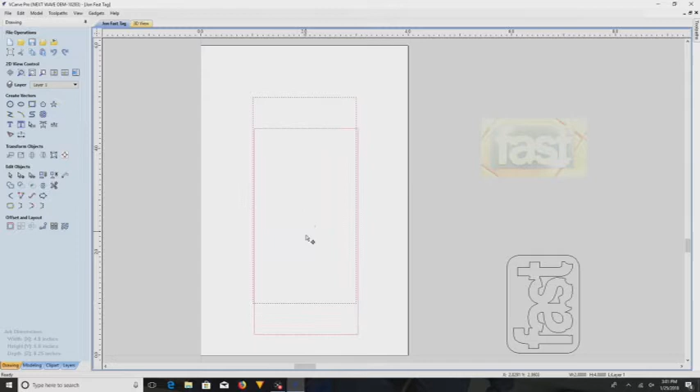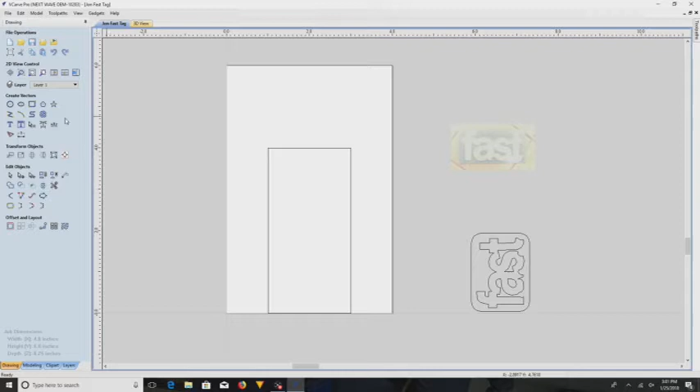That is, for lack of a better term, I guess, the handle. Now what I'm going to do is try to make an arc from this point. Zoom in as much as I can here, get it exactly on, and move this up here. Yep, as much as I can go in. Right there, boom. Now let's go to the other side.

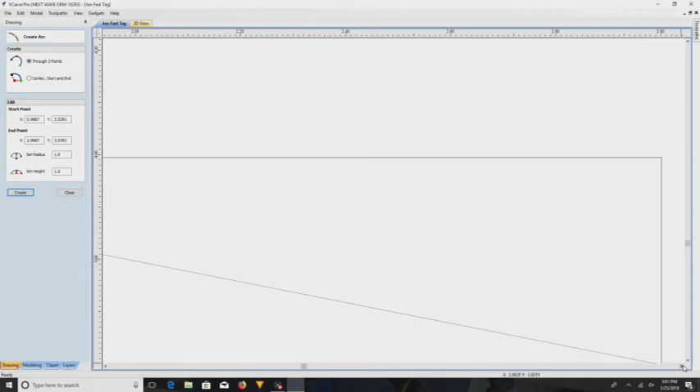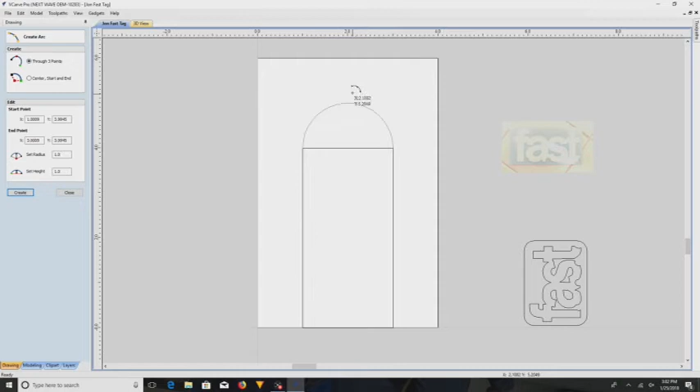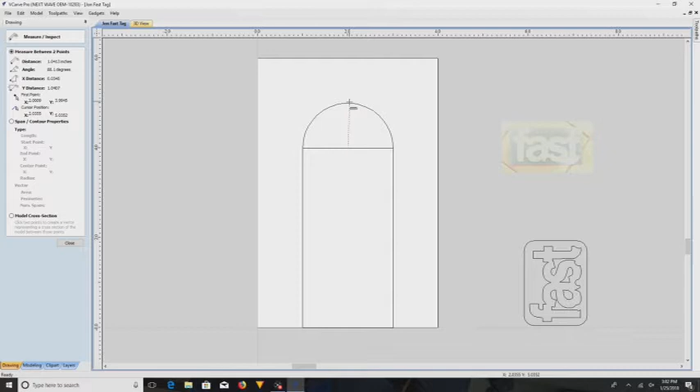There, and now let's zoom back out again. Let's just measure that and see. One inch. Let me measure my trusty little wine bottle opener here. Oh, and I got an inside opening of less than an inch, just about 3/4 of an inch, just slightly more, and that will be my inside opening. I think that's going to do, I think that'll do nicely. So what if I go ahead and...

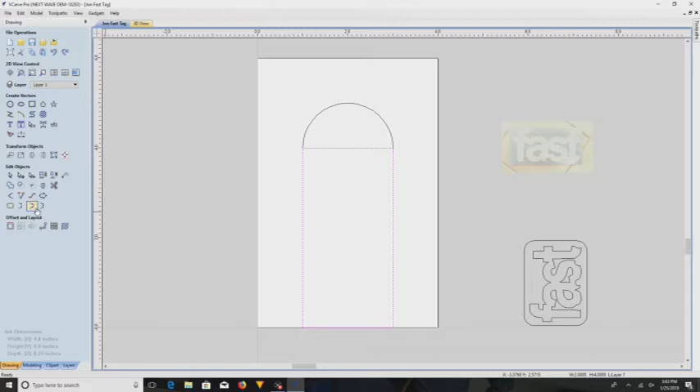I could trace this, boom. And I want to, you know what I'm going to do? I'm going to put some guidelines up. Actually, you know what? I don't know if that's going to work.

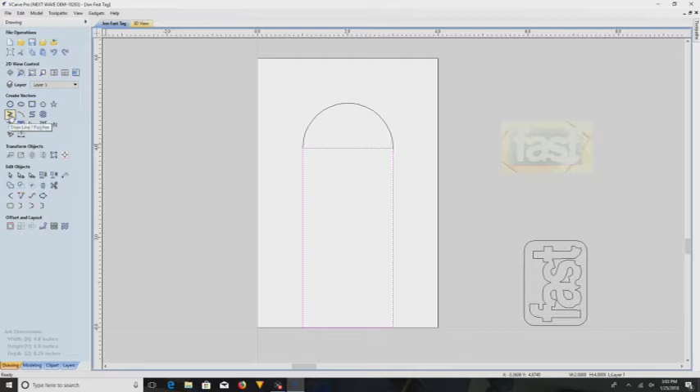Okay, so what if we do this? We go, put a guideline in. I know just for structural integrity, I probably want at least closer to a 1/2 inch between this bottom, because what I want to do is I want to flare this out. So I think I'll go down probably 3/4 of an inch.

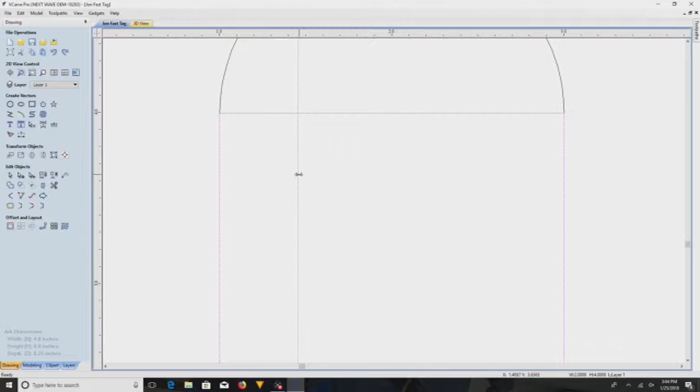So we're going to put a guideline in. Oops, that's fine, we need vertical. I clicked on the wrong line, but we need verticals anyway. Put another one over here. Stop it. And now we'll put a horizontal.

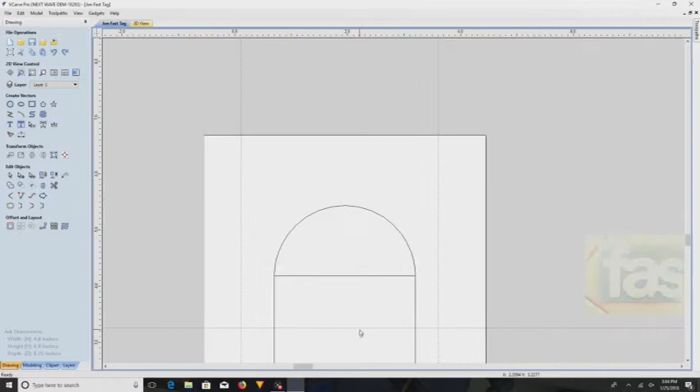So we're going to go down 3/4 of an inch roughly from there. And that's close to 4 inches. It's not perfect, is it? Let's bring this down. Oh, that's 3.3. That'll do.

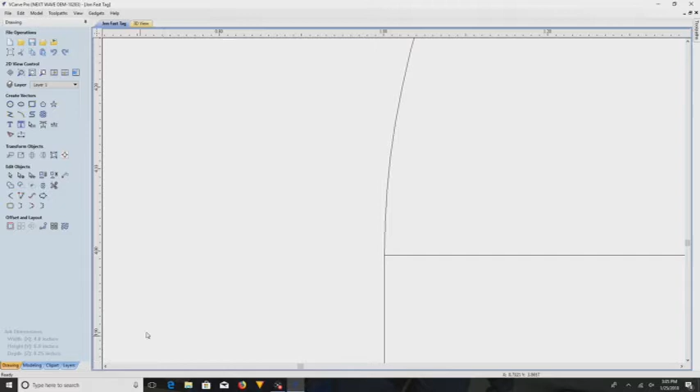Okay, this is, let's go in here, let's zoom in. Okay, so from there, that's on the 1 inch, looks like, real near, close enough to... come on... looks like just over the 1/2 inch mark. So we'll take this to right there, just for the sake of keeping it even, and we'll do the same thing.

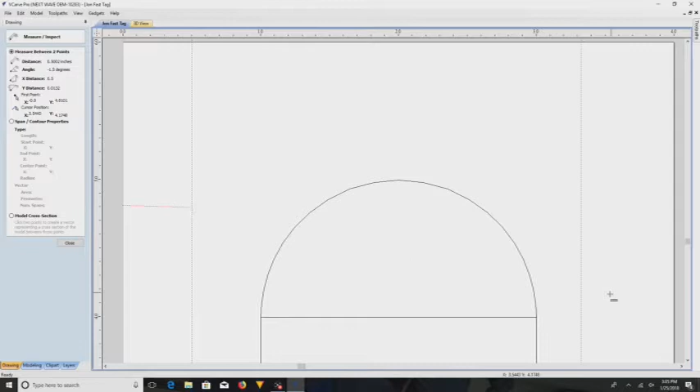Yep, that's half inch. Okay. The number shouldn't be wrong, but it just looked bigger than that for some reason. Then we'll take this one over here and we'll move it to 3.5.

Oh, got to get up with that first. Okay, right there will do.

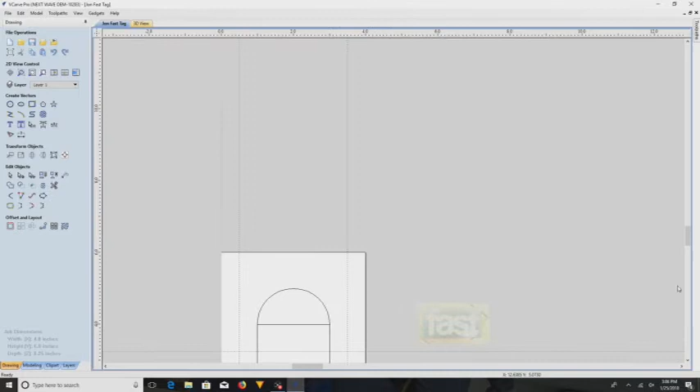And so now, I think what I'm going to do is I'm going to make an arc, and I'll go from here. Actually, do I want to do an arc? Let's see how it looks. There. And then I'll come, you know what? Stop. Let's put another guideline right here.

Oops. Right there, or as close as I can get to it. Perfect.

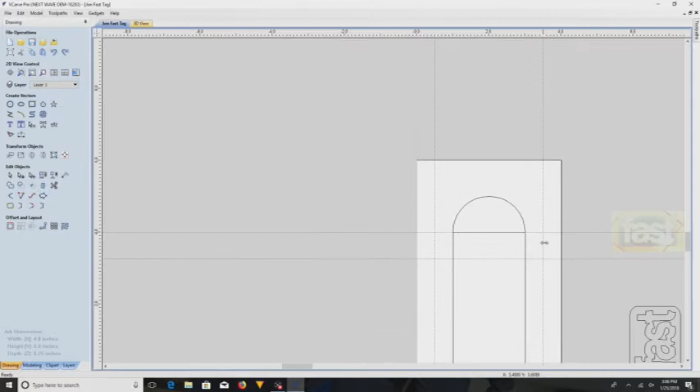And then I'll take my arc, and I'll go from this point to this point and arc it. I guess do it to where it's square on that line there.

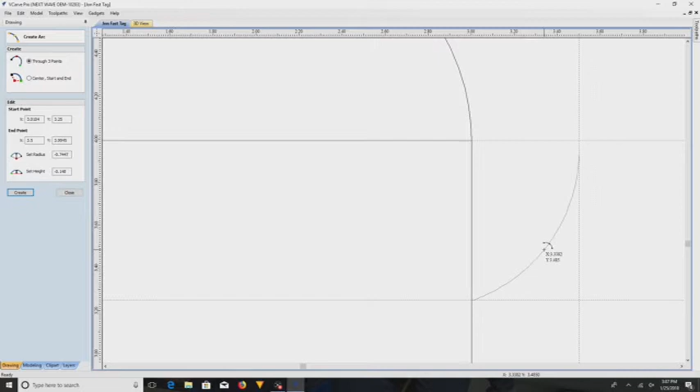Look at it, I'm not even touching. Undo, control Z. Try that again. Zoom out a little bit so I can see what I'm doing.

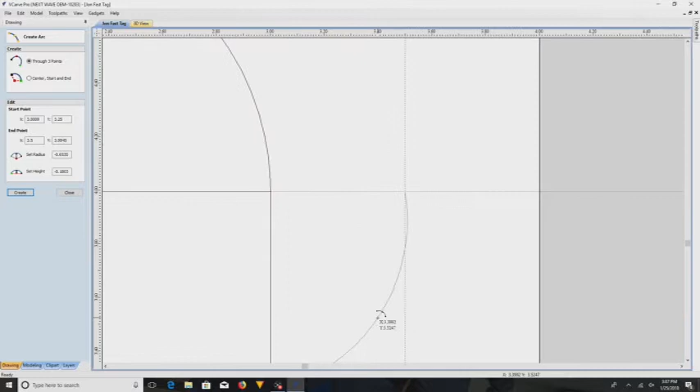Try that. Okay, and now let's do the same thing on this side. Actually, we should be able to just flip this. Mirror, left, boom, close. And now let's just take this over here and put it on those 2 points.

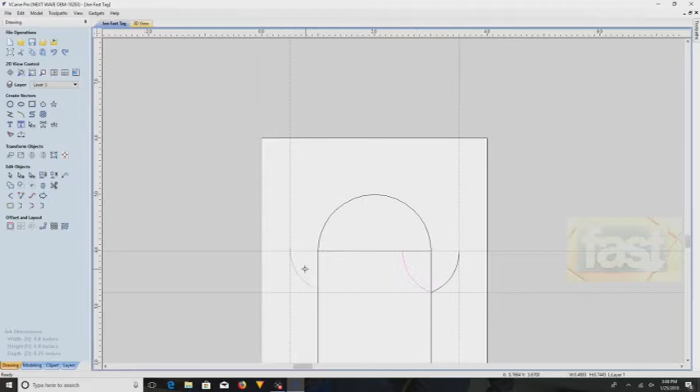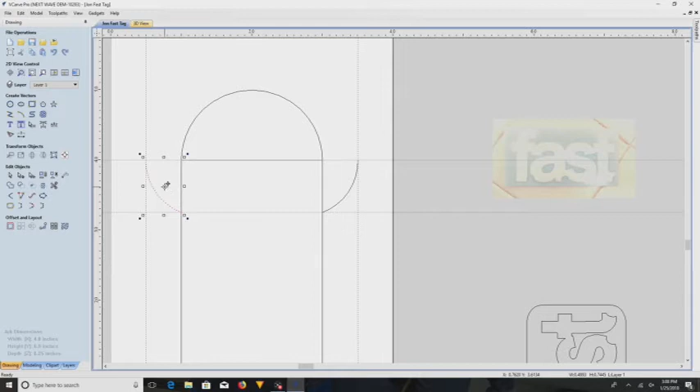It's not there. Ay, ay, ay. Maybe I should have just drawn a new one. There we go.

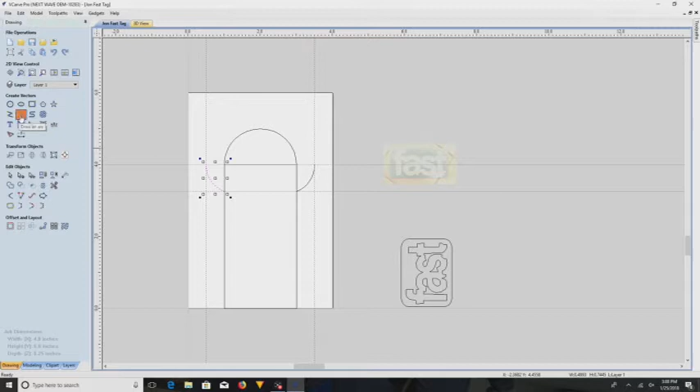So now, what if I just go... I wonder if I can just go like this. Boom. Boom. Boom. Looks like a mushroom. I don't know. Let's see. Close out there.

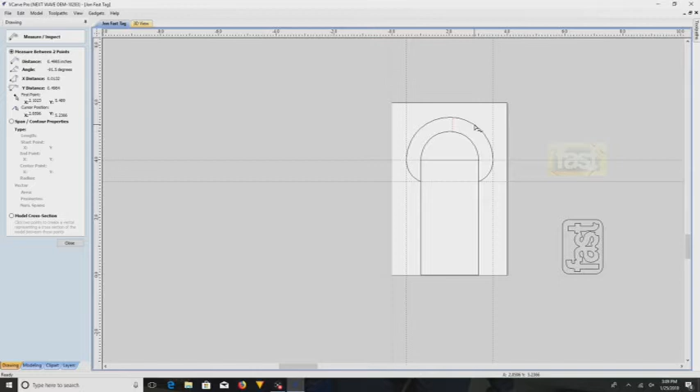Let's measure it. I'm just afraid of it being too thin. It's just like a half an inch. Is a half an inch wide of 1/4 inch thick 6061 aluminum going to be strong enough to pop a top off over and over again and not bend? You know, he's not paying for this, and there's only one way to find out. Let's just go for it. He knows this is an experiment.

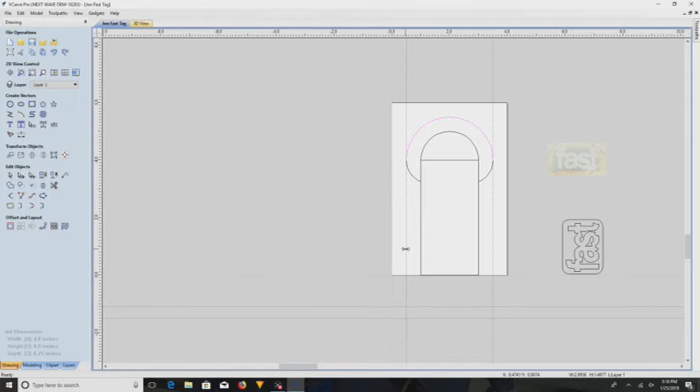Let's roll with it. Now, I think what I'm going to do is I want to stretch it a little. Oh, wait, can't. Next thing I have to do is I have to join all these vectors. I'm going to get these out of here. I'll need them later, but I'm going to get them out for now. Makes it easier to see.

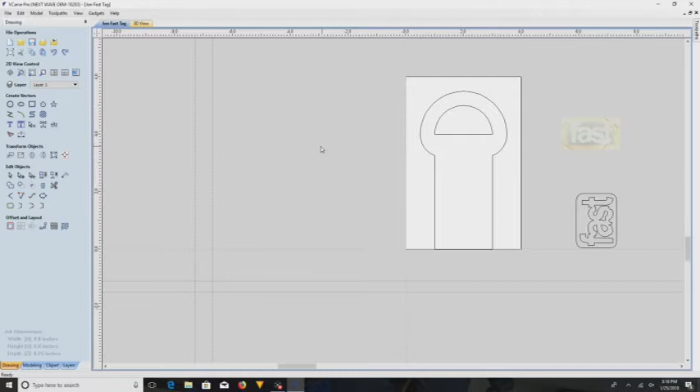Okay, so I'm going to go right-click, select all open vectors. Okay, am I going to be allowed to... Yep, okay, good. Is it just me, or does that look lopsided? I guess not. Yeah, I guess it's fine.

An inside opening of 1.9 inches wide. Let's measure my handy dandy little wine bottle opener. Let's see the inside. This is way too wide. I got an inside opening of like 1 1/8 at best. That's not gonna, I think that's too big.

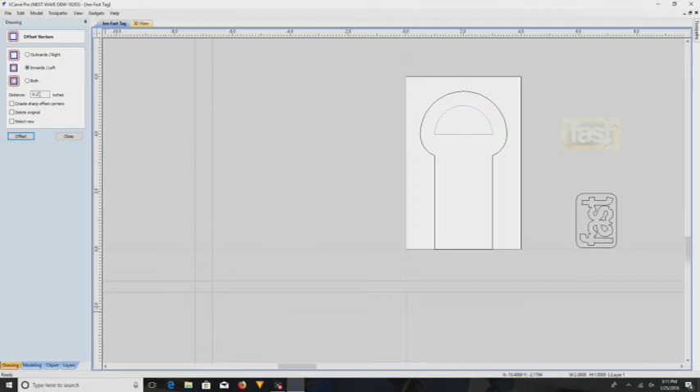What if I go like this? This will actually be better because it'll give me more. Let's highlight that, and let's offset to the inside. 2/10 of an inch, it'll give me 0.4. Let's see what that looks like. Boom. And that's going to make, before I delete anything, let's measure this.

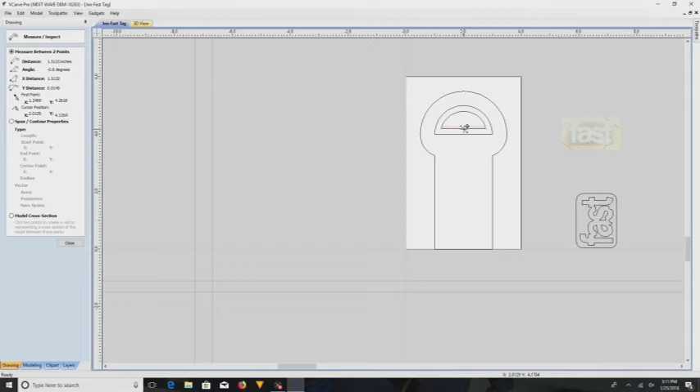1.5, that'll do. That's 1.5 inches. How about this way? Just over 1/2 inch. Let's measure the height. Yeah, I have about 3/4 of an inch.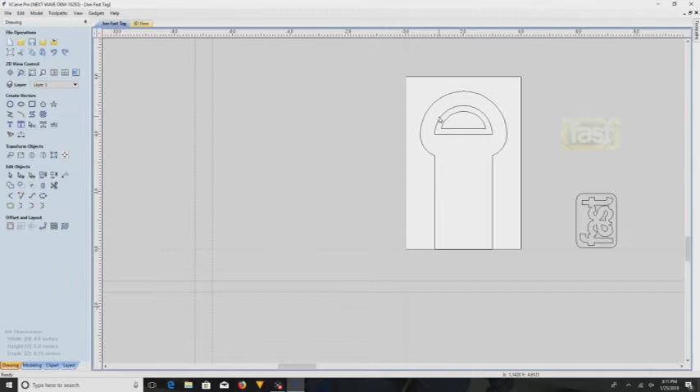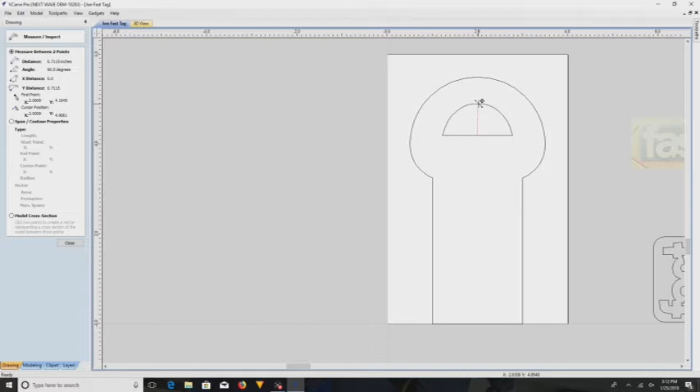But I think that would probably still work. Dilemmas. Let's delete this and see what it looks like. Delete. I wonder if I can just stretch this out a little bit. That looks better. Now let's measure it. Yep, just about, 7/10.

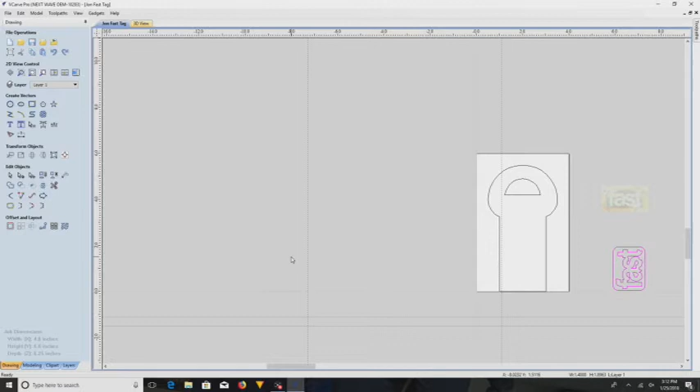Huh. We'll see. All right, so now you take this logo. Oh, I need my guidelines. So I'm thinking probably about 1/2 inch or so from each side. Just get them into place for now.

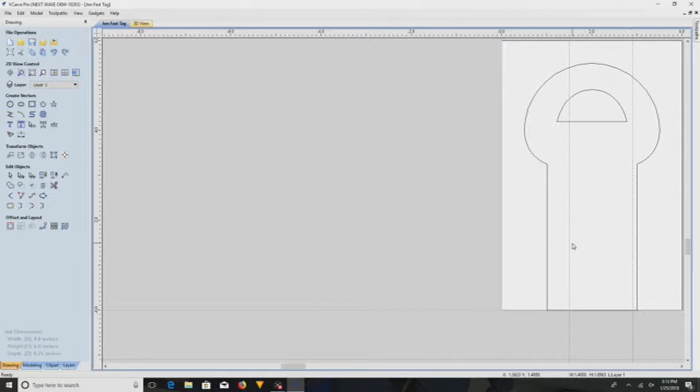So we're at 1 inch. Go to 1.5. Boom. And the same thing over here. We're going to go into... no, that's too big. That's too much. I want it bigger than that. Take it to 5. 1.25 inches in.

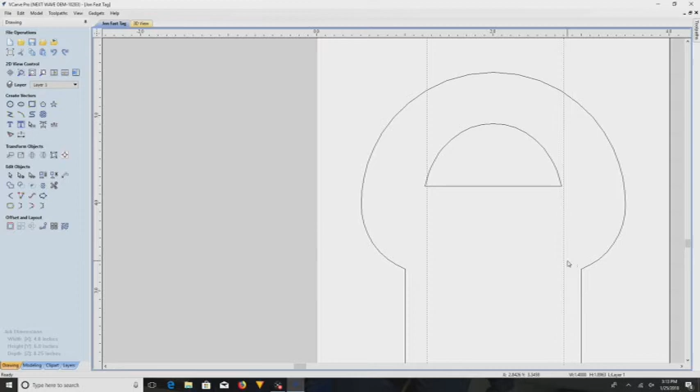And then we'll go in, that's at 3, so we gotta go to 2.75. Let's see what that looks like. Yeah, that'll do. And then we're gonna go ahead and we're gonna move this little bad boy right there. Look at that, almost perfect. Make it a little bigger, a little longer.

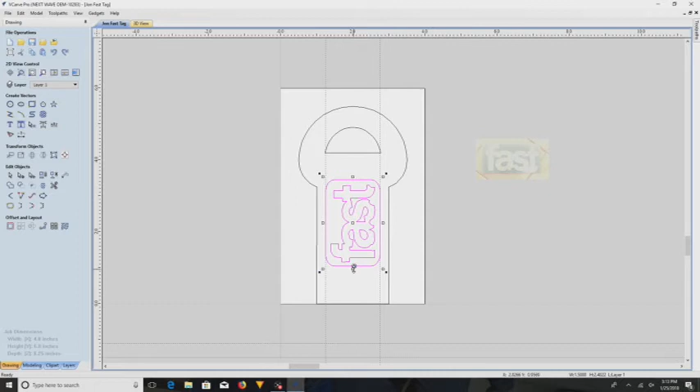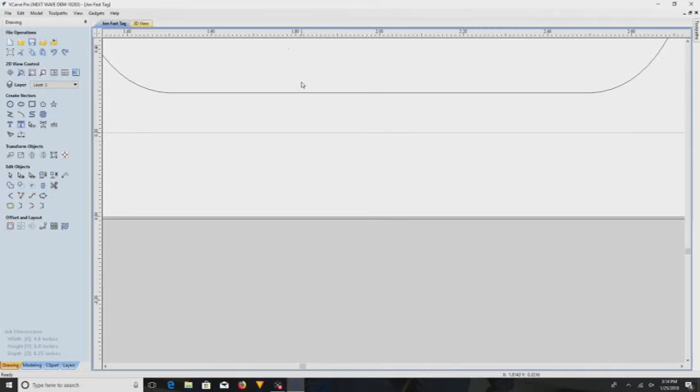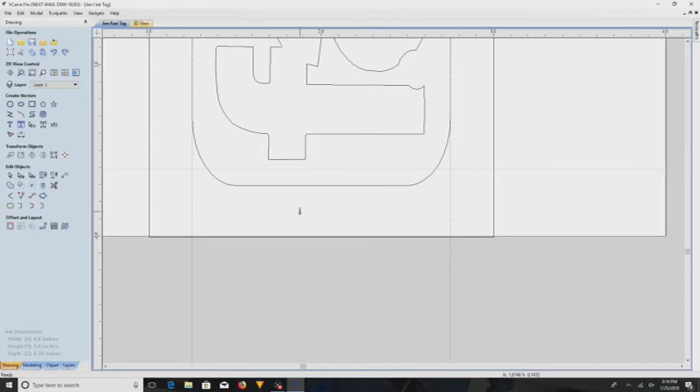You know what? Since I have it 1.25 inches in, I should do the same on the bottom. Oops. Quarter. What? I said 1.25 inches, didn't I? I'm tripping myself right now. 1/4 inch. No wonder. I'm like, this just doesn't seem right.

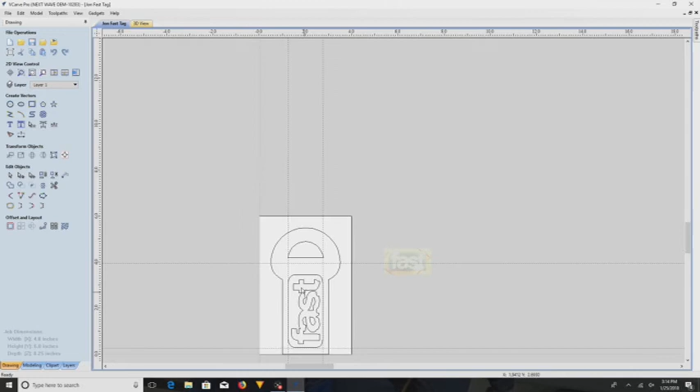And might as well do it at the top too. Where is this at? This is at an even 4.2, so we got to go to 3.95. Boom. Now, all we got to do is just pull this side up and down. I got to zoom in for this.

Now, let's start with the toolpath. Let's do the Vcarve first. We use an 1/8 inch end mill for an area clearance tool. We're going to go pass depth to 0.03, 20 inches per minute. Yeah, that's probably fine. I don't need to go too fast.

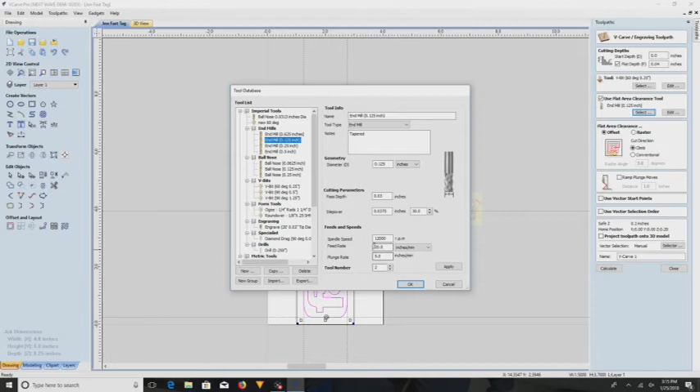Okay, and then we're going to go... Yeah, that's probably deep enough. It doesn't need to be that deep. And we're going to use a 60-degree V-bit, and we're going to calculate that. Reset preview.

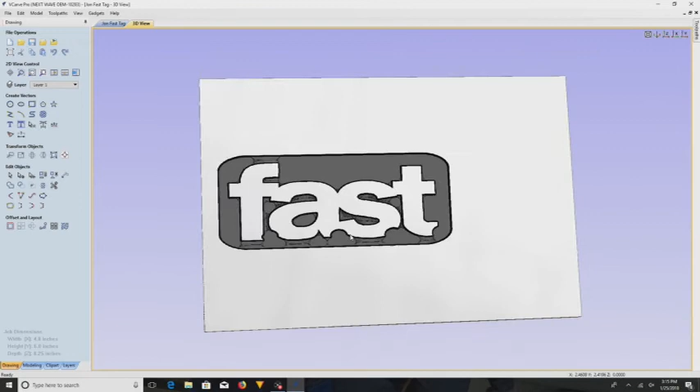Okay, now this is where it's going to get a little funky after this one here. This one's easy. I'm going to do a pocket tool path here. We're going to go 1/4 inch deep with an 1/8 of an inch end mill.

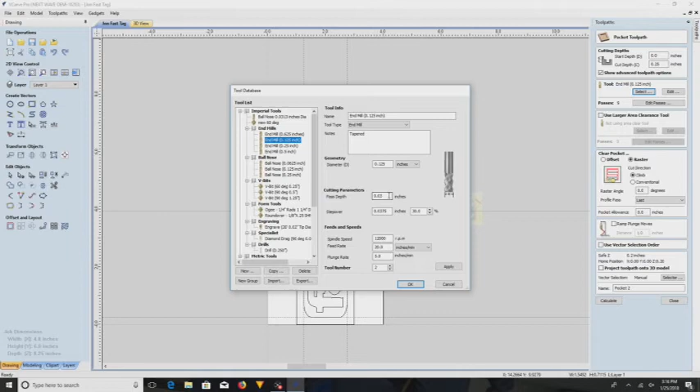5 pass depth 0.03, 20 inches per minute on feed. Let's do it. Calculate.

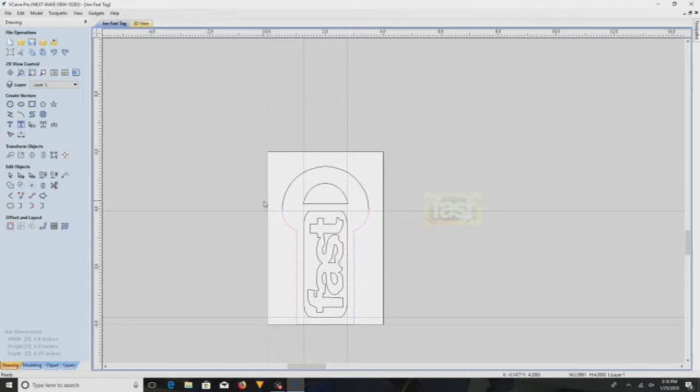Okay, so there's the actual business end of the bottle opener. Now what I need to do here is join those two lines.

Yep, look, it's going to let me do it. Perfect, I hope. We'll find out.

Now I need to go here to offset selected vectors. I need to select them outwards, I think 1/10 of an inch on each side. Let's try it. Oh no, damn it, outwards.

Let's go 2/10. I think that'll do. Offset.

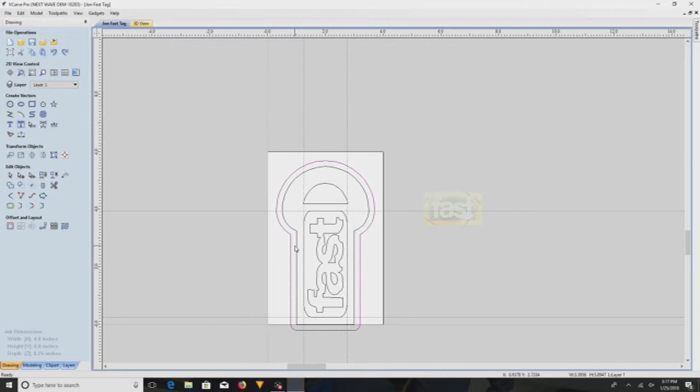Okay, close. Now do the last one, do it twice. See, what this is going to allow me to do is not cut a profile pass. So I'm going to select this, and I'm going to select this, and I'm going to come here, and I'm going to do a pocket tool path.

Whoops. The same way I cut out the keychain fob. It takes a long time, but I think it's going to be much safer on my end mill bit, since I only have an 1/8 of an inch end mill. Let's try this, going down 1/4.

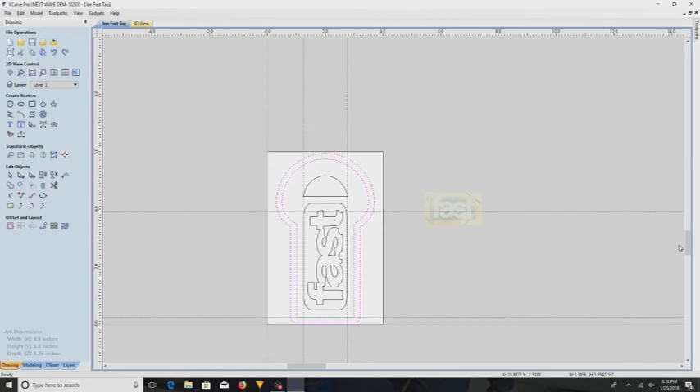20 inches per minute, yep. Calculate. Oops, calculate. Preview.

Yeah, I don't like that. Why did it do that? Seems weird to me. What did I do wrong?

You know what I might be able to do? Let's try this. Ungroup objects, back onto original object layers. Let's get this thing out of here.

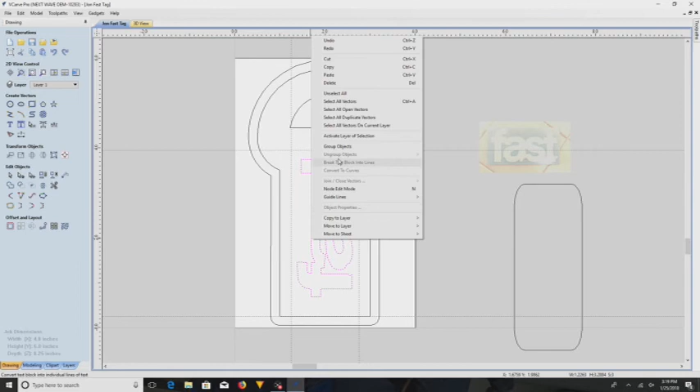Okay, and then let's group them back again. And then let's edit that. We're going to hold shift, we're going to select the lettering, and we're going to select this. Oh no, I can't, no that won't work. I think it's going to mill too much.

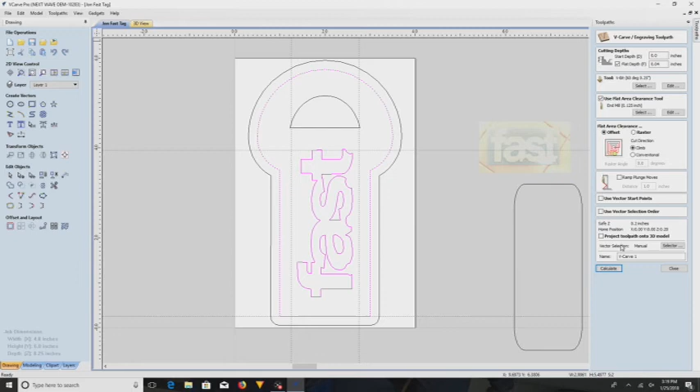Let's try it. I don't think that's going to work. Yeah, no, see, it mills all this down. Okay, undo.

Reset. Undo, undo. Undo. There we go. So I have to make this a little smaller, I think. Let's try that.

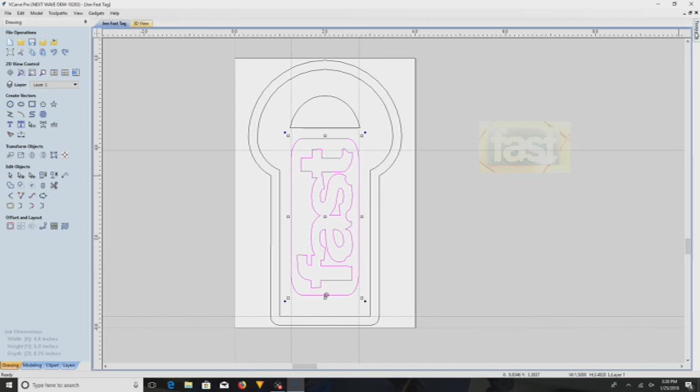Edit, 60 degrees, 1/8 inch. Reset preview, preview. What happened there? Oh.

Whoops, helps to select the right one. See, that's what happens. When you click on edit, watch, it automatically lights up what you had selected previously that you're trying to edit out. By not switching the highlighted part, you're essentially not changing anything.

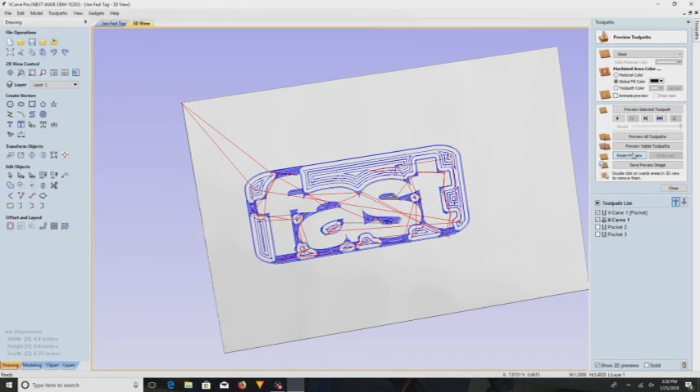Reset preview. Now let's go back to this. Close that. I'm going to edit this one. And calculate. Much better.

And let's go ahead and view. Nope, now I just slid it too far the other way. Okay, well, let's meet in the middle here. Why? It's not up there. That's what I'm not understanding here.

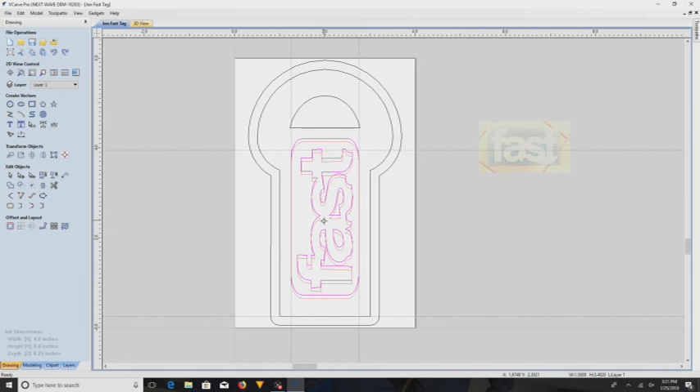You know what? Let's delete all these, do them all over again. Vcarve, everything should still be set the way it was. Reset preview.

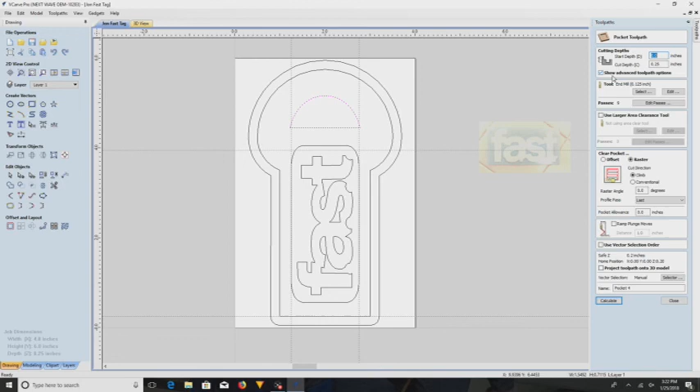Alright, and close. Pocket. Boom.

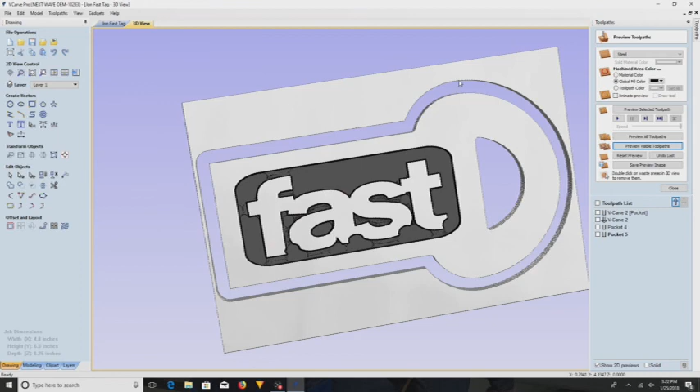And shift, and pocket, 1/4 inch deep. Yep, no, I have a larger tool, clearance tool. There we go, much better. Looks pretty symmetrical, maybe not perfect, but I think it's fine.

Well, let's do this. I'm going to get off of here. I'm going to post this video. And if there's time, I'm going to go out to my garage and I'm going to make this bad boy. Hopefully about 2 days from now at most, I might be able to finish it.

Let's see, pocket 5 is going to take 1 hour and 10 minutes. Pocket 4 is going to take 20 minutes. The Vcarve takes 45 minutes, and 9 minutes on the pocket, so an hour. It's going to take about 2.5 hours-ish. I'm not going to finish it today, but I can get it started today.

And hopefully about 2 days after this video is posted, there'll be either a fail or a succeed video for this. So I appreciate you guys watching.